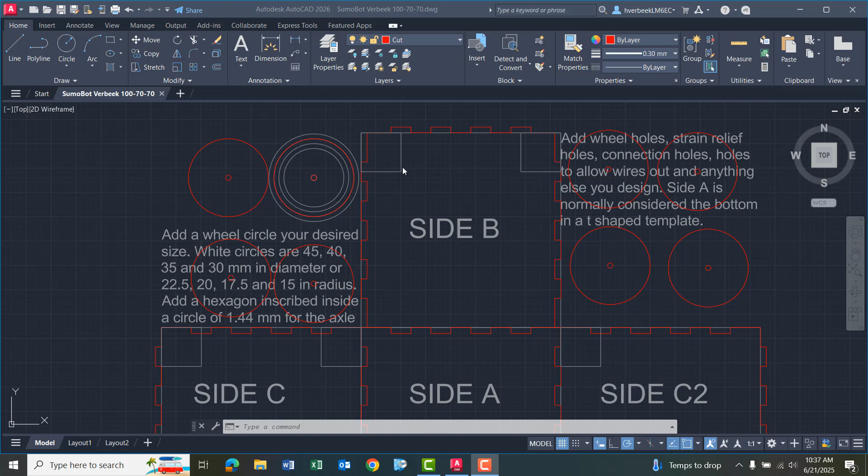For the wheel holes, an M5 bolt takes a 4mm hole. So we're going to start off nice and zoomed in. We're going to grab my circle tool, and I am going to do center diameter, click here, and just type 4. I'm going to press enter. And if I measure this, it says 2 because it's a radius of 2.

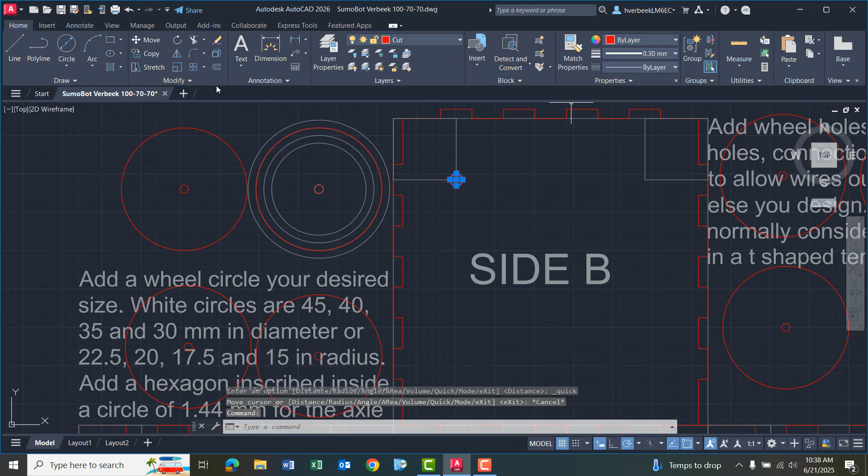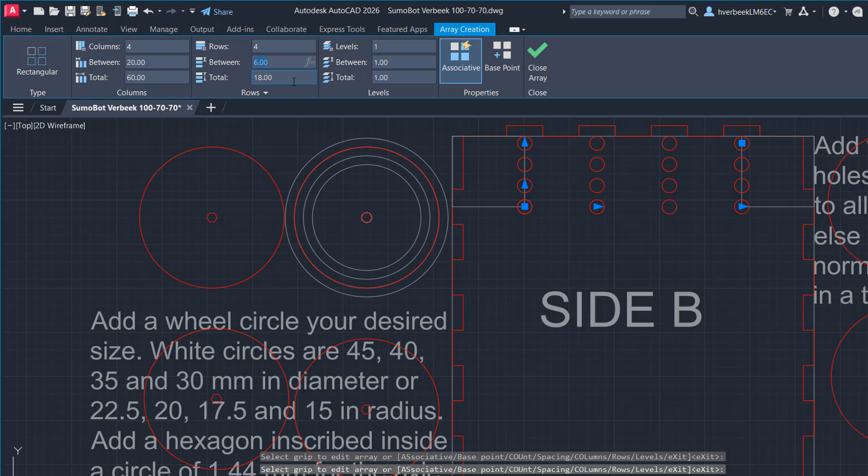Now what I'm going to do is hit escape, then click on this so it's selected. Then I'm going to go to my array tool, and tell it to be 4 columns, 4 rows. Because we've got 100 millimeters, you're going to have to do some math based on how big yours is. Between is 20, and between the rows is negative 20 because I want to go downwards. If I do positive 20, it'll go upwards. And there I have my array.

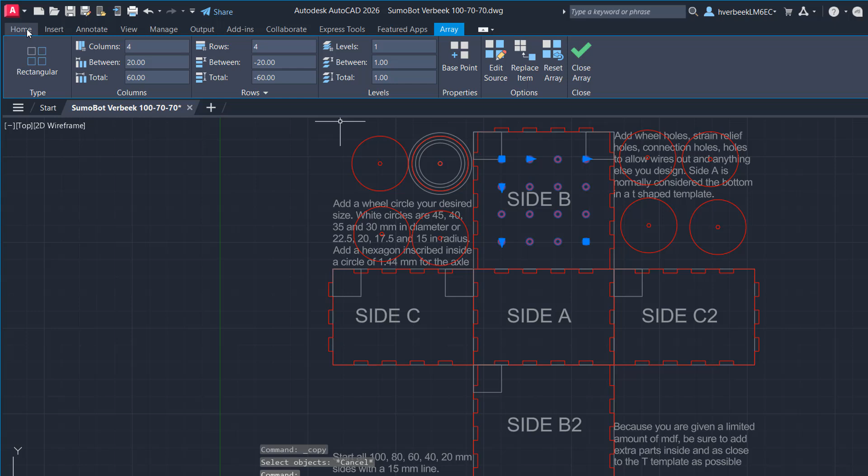Then I would copy and paste it to my other B side. So now I'm going to go to the home, select it, hit copy, grab it here, and snap this one on here. Then I'm going to hit escape. I am not going to do the bottom one, and I'm not going to do the sides.

So what I'm going to do here is grab another circle, click on the corner, and again press 4 and enter. Then I'm going to select it, go to my arrays, and because it's only 70, I'm going to go 4 and 3, but I'm going to try with 20 in the middle, enter, negative 20, and I already know this isn't going to work.

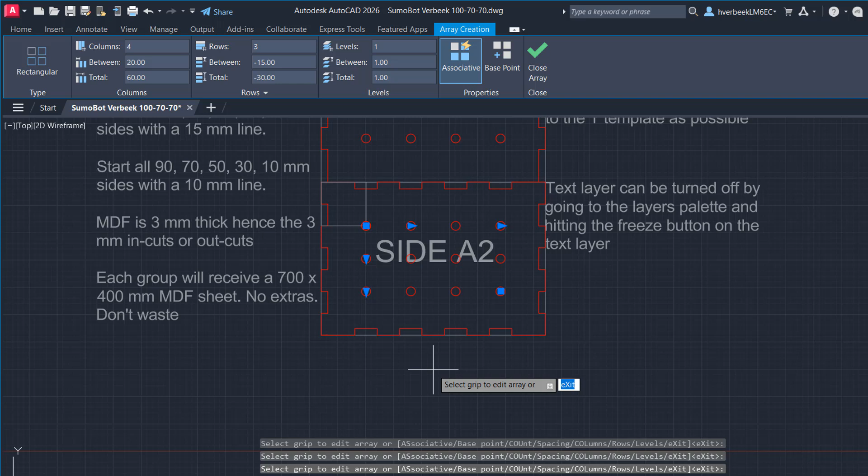And you can see it's too close. So we could try negative 15, and we probably should test.

I'm just going to hit escape, and I'm going to just be sure that this is the exact same size. So I could grab a quick line tool, and go up here to 20, and you can see that it's on the center. So I'm just going to hit that and hit escape, and then I'm going to delete it.

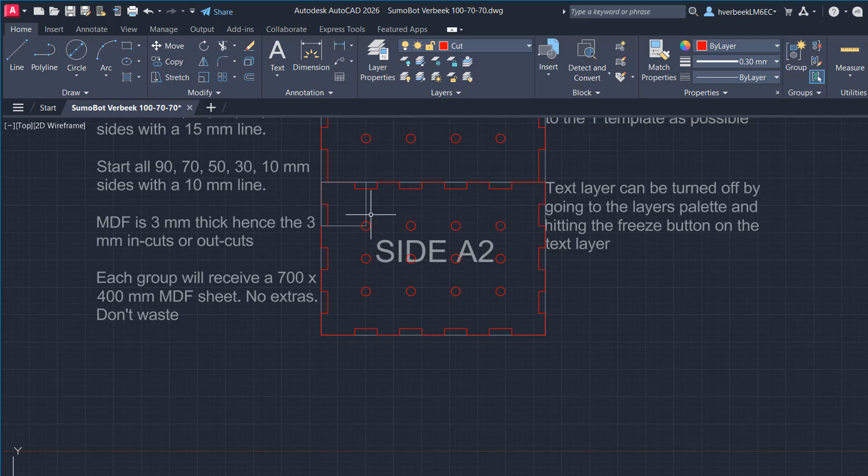So that was my little check to make sure that we had the right amount. So we've got 20 there, we've got 20 there, and then we got 15 and 15. So 20 and 20 is 40, plus another 15 and another 15 is 70. So that's how that makes that fit. We are not going to do it on the bottom.

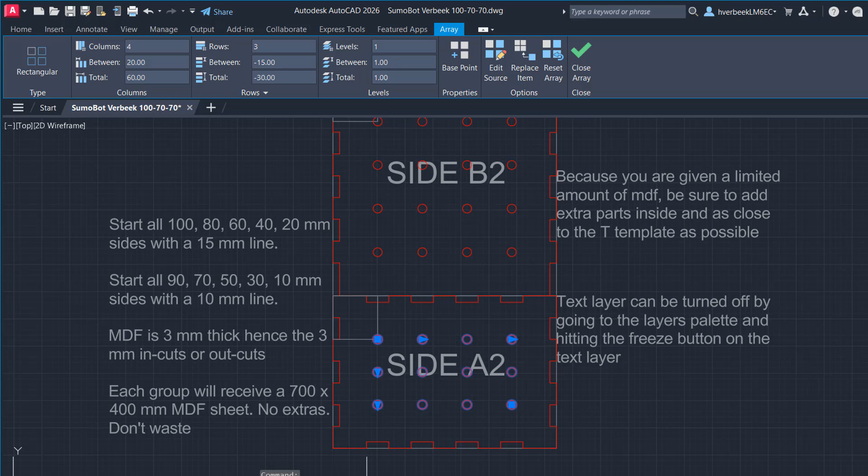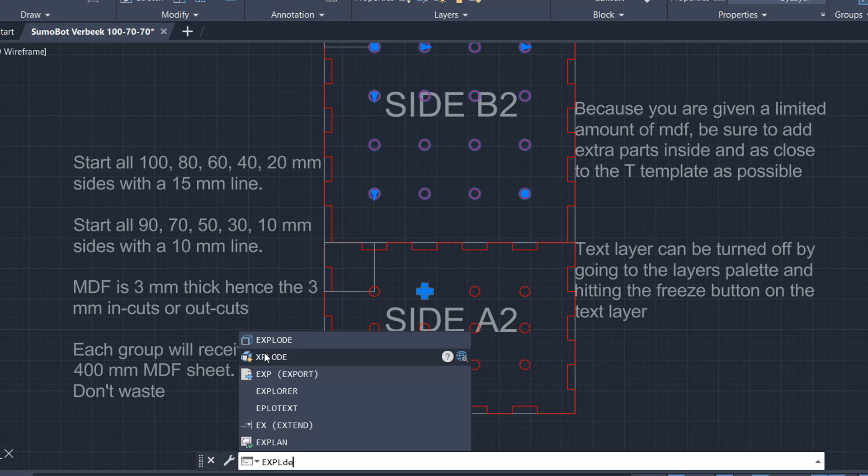Now, the only other thing for printing these things, it's very important that we click on this, and because it's an array, we have to hit explode when you press enter. And then you can see when I click on this, they're individual pieces. So for it to print, we need to hit explode on all 3 of them. So we're going to type explode, and then I'm going to go up to the top one.

Now they're all good. Now I could go to my layers palette, and I'm going to take my text layer. I'm going to freeze it so I'm not looking at such a busy page. I'm going to zoom out and everything looks good.

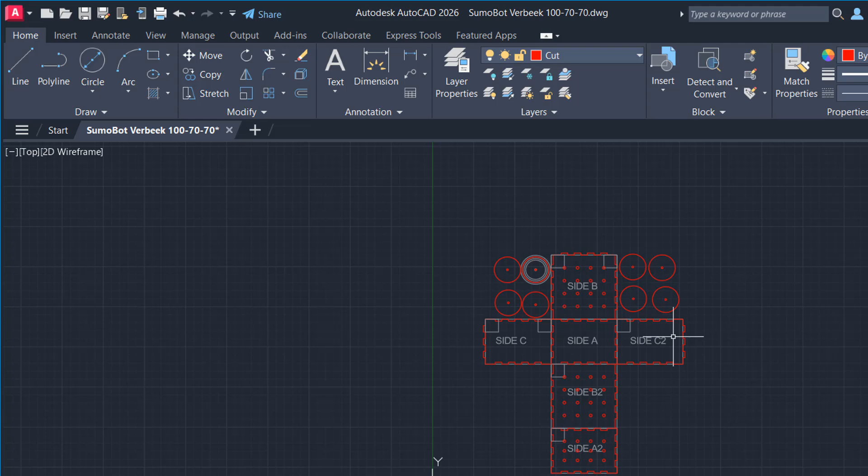I've got my 8 sets of wheels. I've got all my connection holes. I'm leaving the side alone. You could put some on there if you want to. I'm not going to, and that will be your choice. So that is how you make your connection holes.

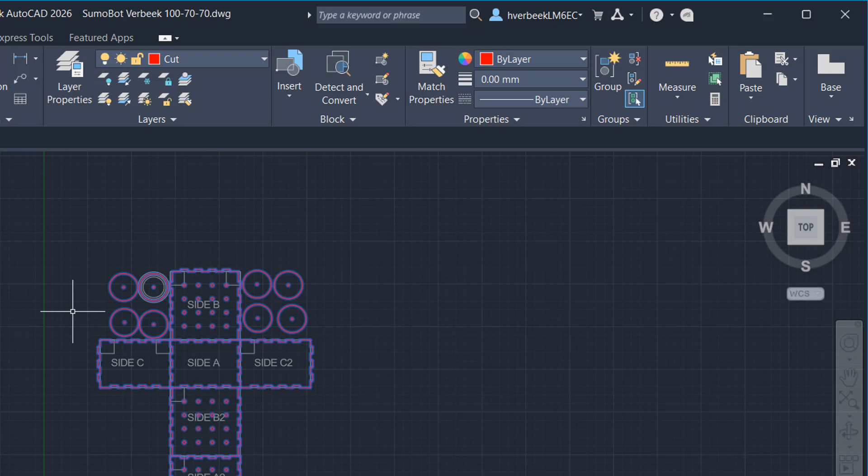The only thing we should check is we should select it all, and then we should make sure it's all red, and we should make sure that it is 0 millimeter. So all the red stuff is 0 millimeters before we print.